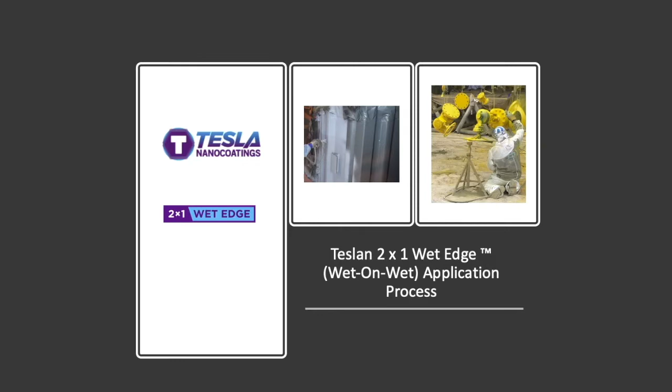Hello and welcome to the Tesla NanoCoatings Teslan 2x1 Wet Edge Application Process Training Module. This module is designed to familiarize the applicator with the proper procedures to use when applying Tesla NanoCoatings products via the Teslan 2x1 Wet Edge Wet-on-Wet application method.

What does the 2x1 wet edge, wet-on-wet application mean? Quite literally, it means exactly what it suggests. Tesla NanoCoatings has developed the ability to apply their Teslan top coats to wet, uncured primers that have not dried. Clients are realizing dramatic increases in productivity due to the ability of applying multiple coats at one visit with the same crew on the same day.

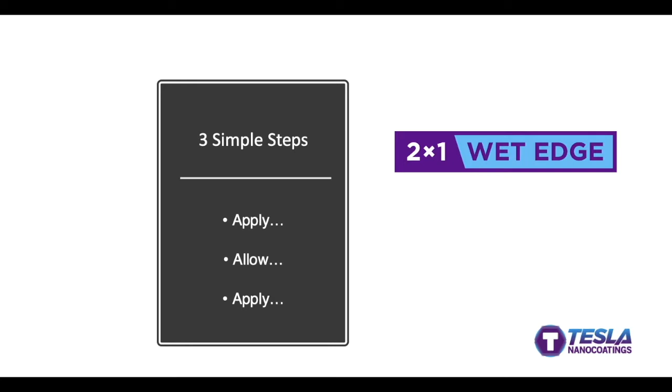The results include a reduction in backlog work, reduced downtime, reduced POB, and faster return to service. You're getting double the protection at half the cost. Applying Tesla coatings via the 2x1 wet edge process is as easy as remembering three simple steps: apply, allow, and apply. Let's see how these three steps apply to the Teslan epoxy top coat process.

For the 2x1 epoxy wet edge process, you will apply the appropriate Teslan primer for your specific application. You will allow a minimum of a 30-minute flash-off period where the solvents will evaporate. Please note that the flash-off period may vary depending upon temperature and humidity. And then you will apply the selected Teslan epoxy top coat. Be sure to apply Teslan primers and top coats in accordance with their product data sheets, application, and equipment recommendations.

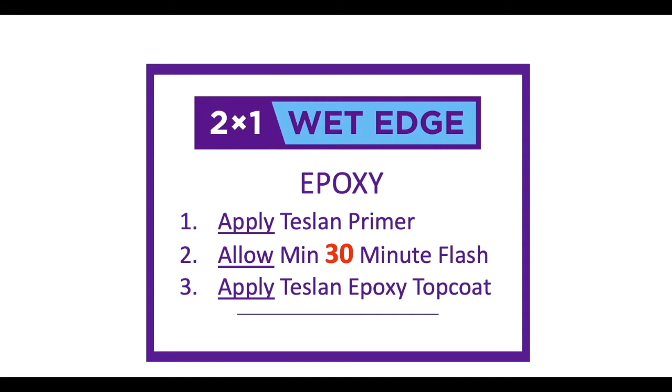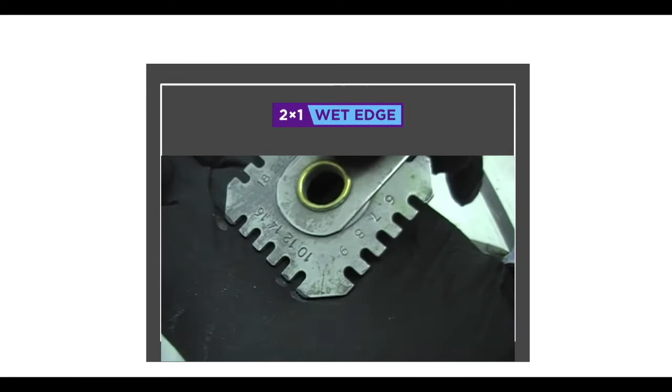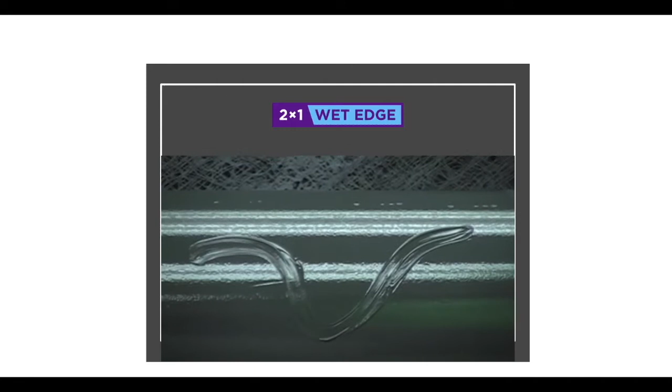When applying the Teslan primers, it's important to take continuous wet film thickness readings throughout the primer application process to ensure compliance with the specification and product data sheet. Teslan primers are commonly applied between 10 and 12 mils wet, 250 to 305 microns. Once the proper wet film thickness is reached, allow a minimum of 30 minutes before top coating for the primer's solvents to flash off. As seen in the video, the line I draw on the paint film demonstrates that the primer is still wet after the 30 minutes have elapsed.

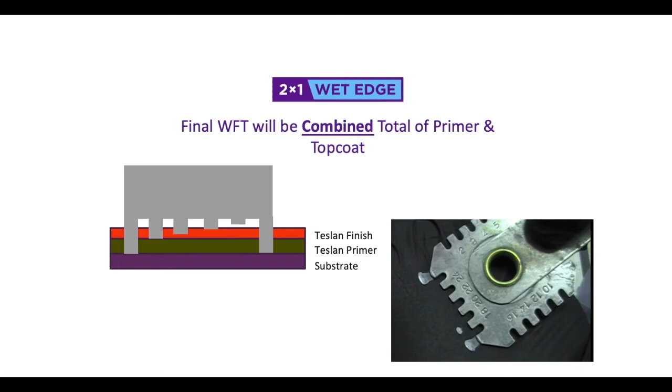Although the primer is still wet, you can now apply Teslan epoxy top coats in accordance to the product data sheet's application and equipment recommendations to the wet, uncured primer. The top coats are commonly applied between 8 and 10 mils wet, 205 to 250 microns. It is important to remember that the total wet film thickness measurements taken on the gauge during the top coat application is now a combination of both the primer and the top coat's wet film thickness. Now let's take a look at how the three steps apply to the Teslan urethane top coat process.

For the Teslan 2x1 wet edge urethane top coat process, you will apply the appropriate Teslan primer for your specific application. You will allow a minimum of 90-minute flash-off period where the solvents will evaporate. Again, please note that the flash period may vary depending upon temperature and humidity. And then you will apply the selected Teslan urethane top coat. Just like with the epoxy application, taking continuous wet film thickness readings during the primer application is required to ensure compliance with the specification and the product data sheet.

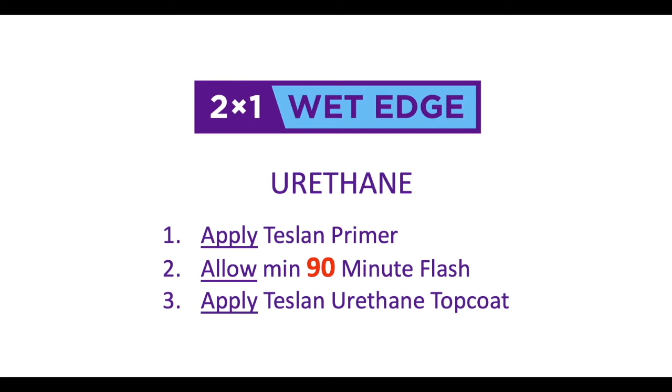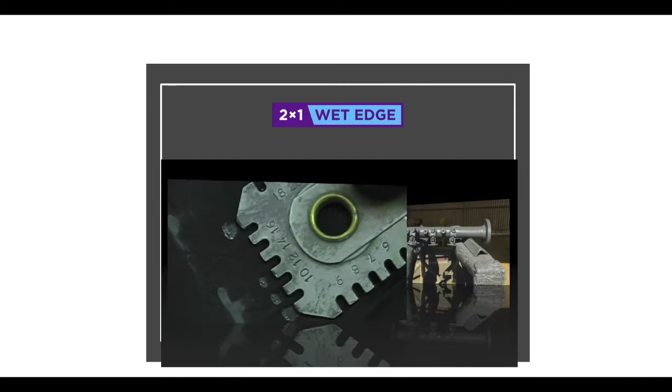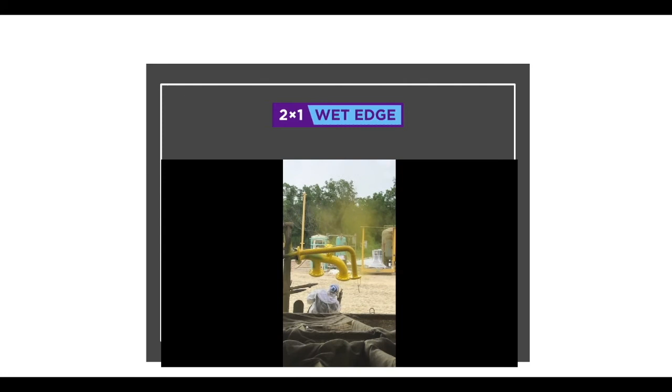Teslan primers are commonly applied between 10 and 12 mils wet, 250 to 305 microns. Once the proper wet film thickness is reached, allow a minimum of 90 minutes for the primer's solvents to flash off before top coating. Although the primer is still wet, you can now apply Teslan urethane top coats in accordance with their data sheet. Urethane top coats are generally applied between 4 and 7 mils wet, 100 to 175 microns. It is again important to remember that the total wet film thickness measurements taken during the top coat application are a combination of both the primer and the top coat's wet film thickness measurements.

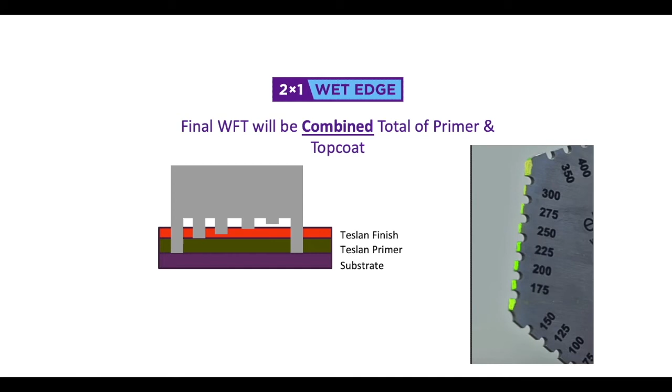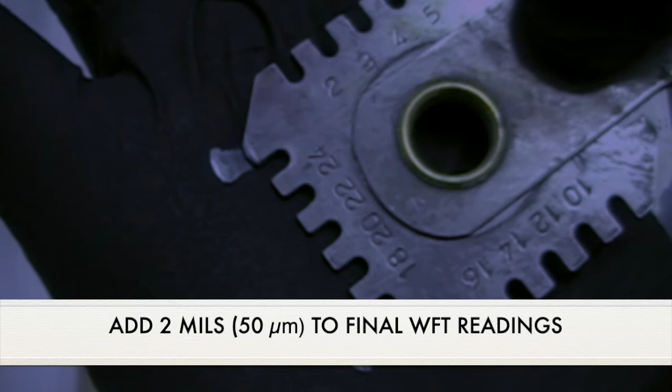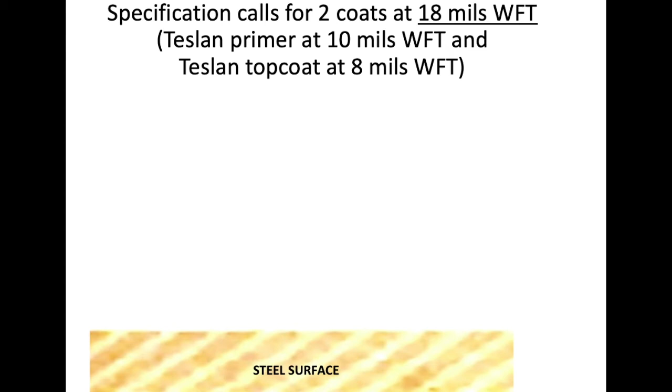Please note that as the primer's solvents evaporate during the flash-off period between the primer and top coat applications, the wet film thickness of the primer coat will decrease by approximately 2 mils. Therefore, when recording wet film thickness measurements taken during the top coat application, you'll need to add 2 mils to the wet film thickness readings you get. For example, let's say the specification requires that the Teslan primer is to be applied at 10 mils wet film thickness, and the Teslan top coat is to be applied at 8 mils wet film thickness, making for a total system wet film thickness of 18 mils.

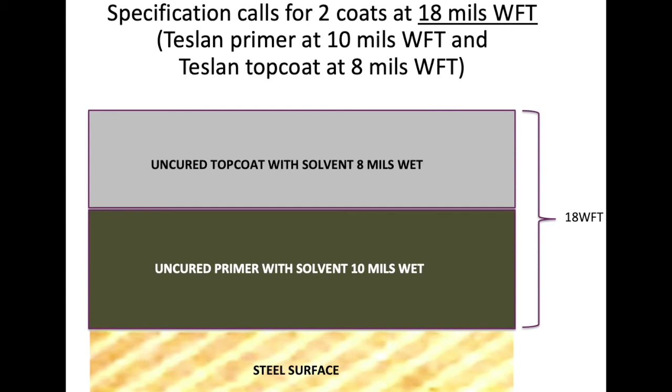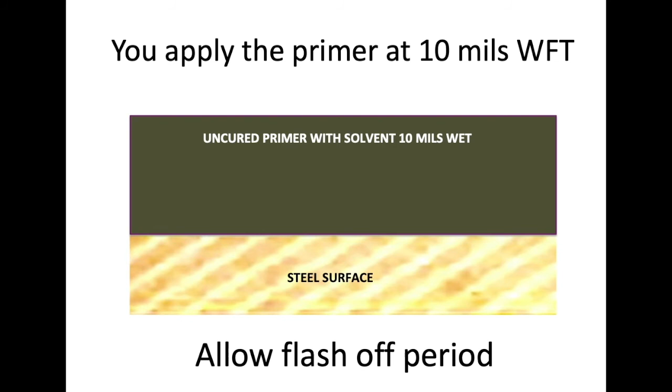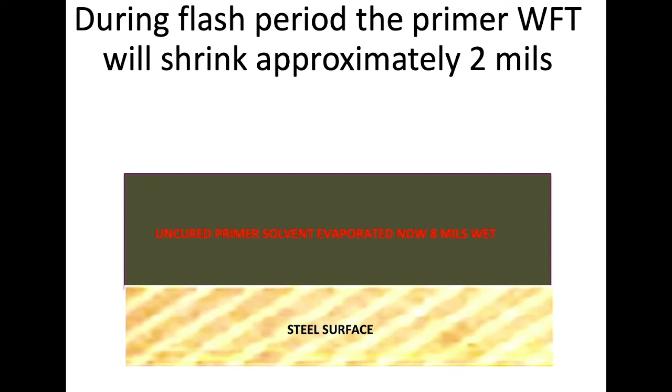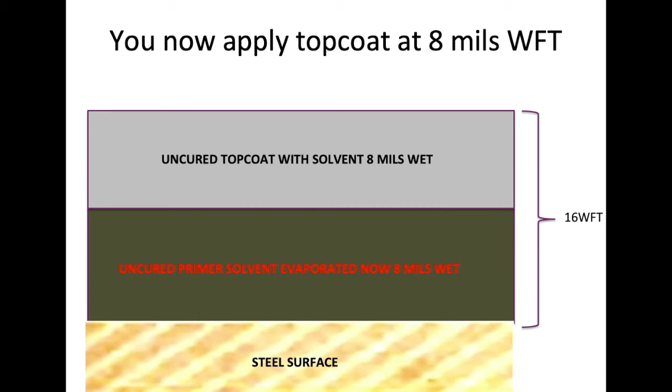You therefore apply the Teslan primer at 10 mils. But now you need to wait the appropriate time for the solvents to flash off to use the Teslan 2x1 wet edge process. During this flash off period, the solvents flash off and the volume or the wet film thickness will shrink or reduce by approximately 2 mils. When you now go and apply the top coat at 8 mils wet film thickness per spec, and then you measure your wet film thickness during this application, you will get a total wet film thickness of 16 mils and not 18 due to the volume lost during the solvents flash off period. To account for this, you'll need to add 2 mils to the final wet film thickness readings during the top coat application to account for what was lost during the primer's flash off period.